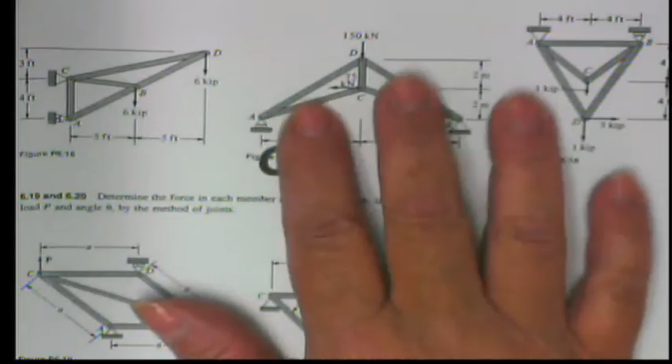All right, everybody. So right now we are starting to do a little bit of review on our homework, and we're talking about problem 617. We had a question about the angles. Now, first of all, if you started at point D, I would be concerned because you have 3 unknowns. Okay? So that would be a very difficult joint to start out.

I would probably do my statics first. Always do your statics first, no matter what. Find out the reactions at A and B. And then after that, I would work my way up. You know, but always look for a joint where there's only 2 reactions. But the specific question is, what does the geometry look like and what do my forces look like here at point D? And that's a very good question.

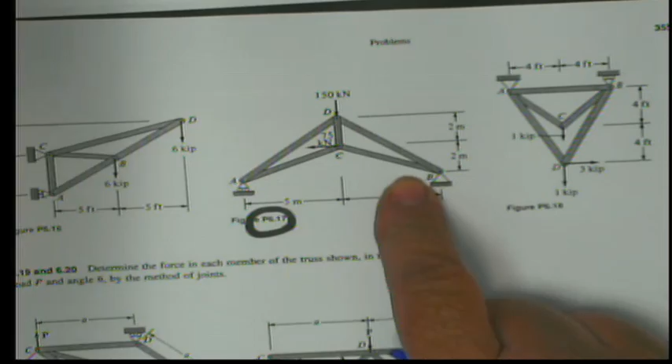All right. Well, if we draw this out, now I'm not sure you can see what I'm drawing. No, you cannot. Let me widen this out. Okay, there we go. So this is what D looks like. And what you really want is this angle, all right? Because we're still resolving everything back into x and y components. So that's kind of the big deal. So let's call this

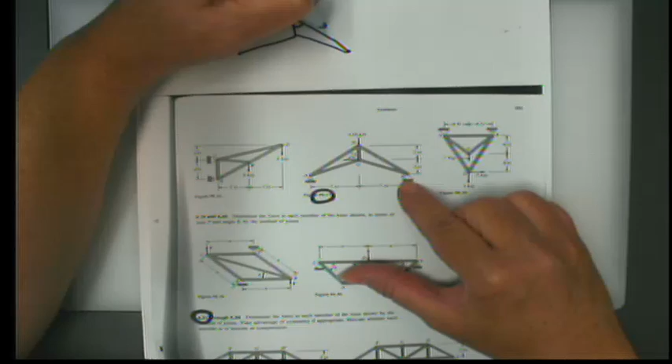dB and this dA. Now, one thing I want to show you is, because we have a force of 150 here, that is symmetrical, but this 75 kilonewton force kind of throws everything off. So we're not going to be able to really use symmetry in this, are we? Okay. In the second problem in 621, the forces are applied symmetrically and the distances are symmetrical, so we can use symmetry there. But here we're kind of out of luck. We're going to have to look at every single structural member. Okay. So what is that angle?

Well, what we are told is that this distance is 2 meters, and then the distance down to the bottom is also 2 meters, and this distance is 5 meters. Okay, so if we're looking at this angle, it's really based on this triangle where we have 4 and 5. So the vertical distance is 4 and 5, or if you knew this distance, this is 2. If you knew how far it was this way, you could use that angle. But here's where I have all of my data.

So if I call that angle, let's just say angle D, we have the opposite and the adjacent side, opposite, adjacent, and that is tangent. So the angle of D is the inverse tangent of 5/4.

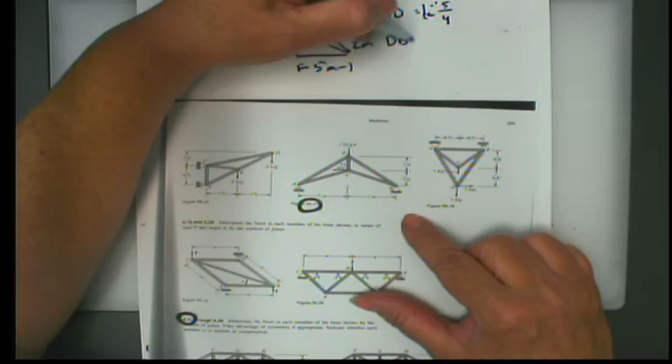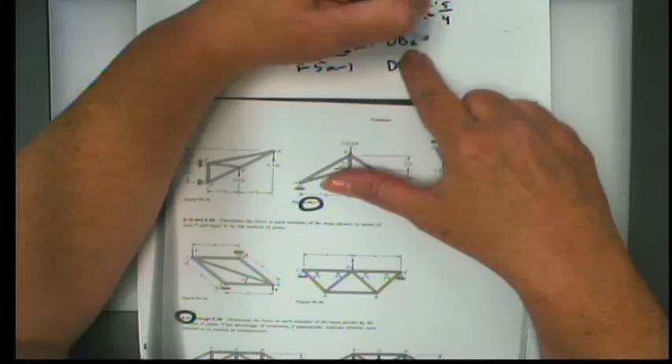Okay? Now, in order to use that, when we look at D sub B, for example, we're going to have D sub B in the x direction and D sub B in the y direction. In the x direction, since this angle is here, this is opposite, isn't it? So D sub B in the x direction is the entire force D sub B times the sine of angle D, since opposite over hypotenuse is the sine. And so this, because it's adjacent, would be dB cosine of the angle of D. Okay.

And this all harkens back to trig, which may have been a few years since you guys were doing the trig. But yeah, it can be confusing if you start looking at, well, what about this distance or that distance? But we're always taking everything back to x and y. You know, those are the coordinates that we'll use almost exclusively in this class, Cartesians.

Yeah? I don't know about the other guys in the class, but I think my biggest issue is I'll get to working and I just lose my train of thought. Like, is there some sort of way to keep your thoughts organized?

Well, just like maybe. I didn't mean that as a joke. I was serious. It's like a concern. You can meditate a little. No, I'm just kidding. So.

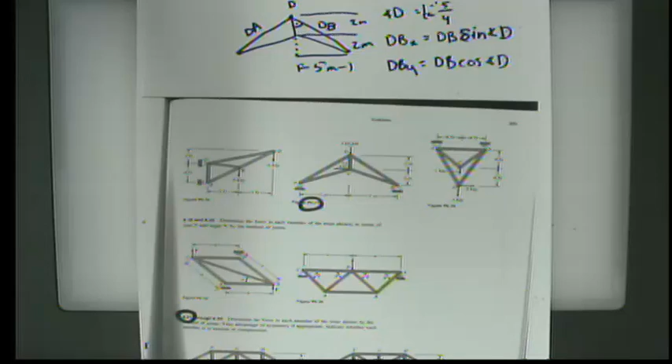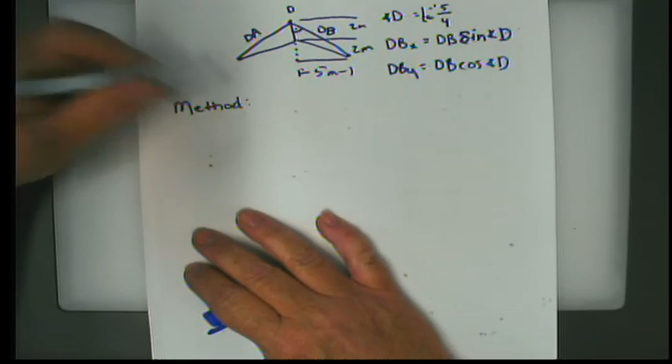No, is there something like just a list of procedural steps that we can follow? Yeah. Yes, this is what I would do, as sort of a method or a cookbook. The first thing that you should always do is your statics on the entire structure. So the external statics on the structure. Okay? So in other words, when I look at this, I'm going to bring this up, because they draw nicer than I do.

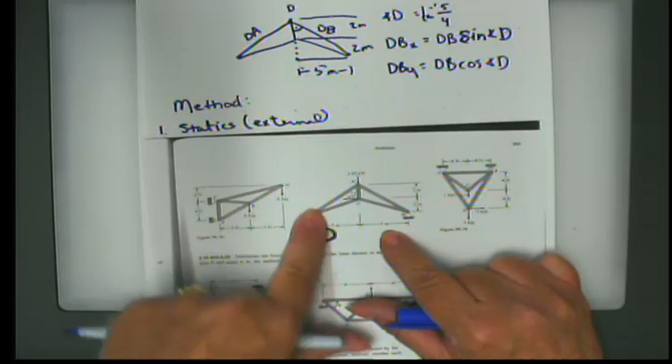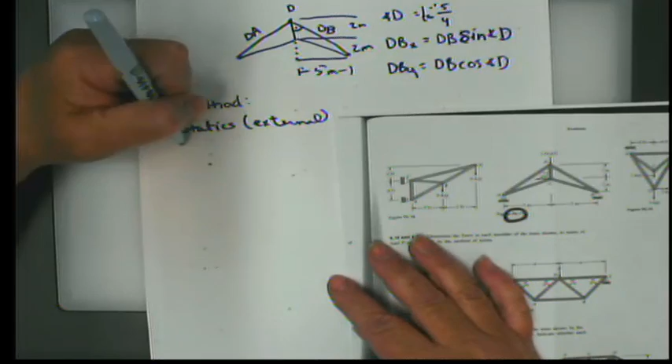I don't even know what I'm spelling today. I apologize.

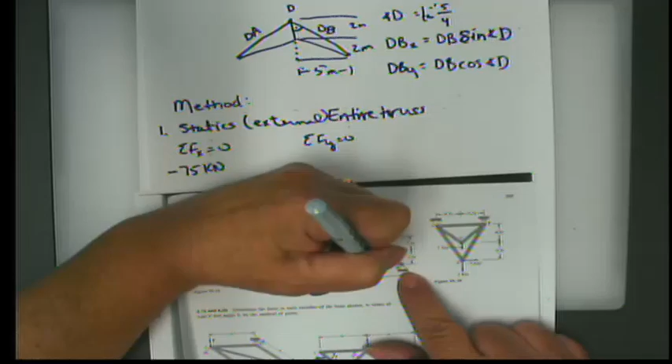Okay, so in the X direction, what do I have? Negative 75 kilonewtons. I don't have anything that's going to be borne here because this is a rolling support. So I'm going to have a reaction at B in the X direction, and I've drawn it as positive, equals 0. So what does that tell me? It tells me that the reaction at B in the X direction is 75 kilonewtons. Okay, so I'm just looking at the externals here.

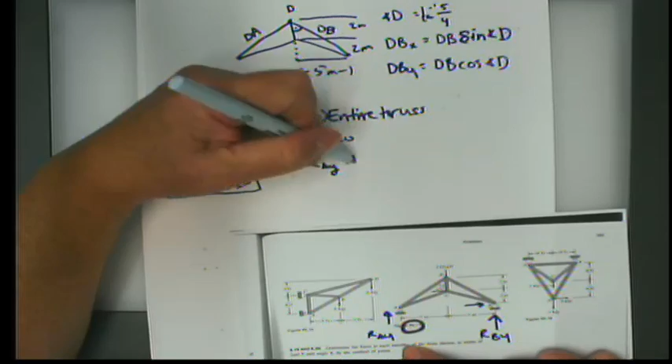Now, what about on A and B? I'm going to draw it positive. Doesn't mean it really is, but this would be the reaction at A in the Y direction, the reaction at B in the Y direction. So the way I have it drawn is the reaction at A in the Y direction plus the reaction at B in the Y direction minus 150 kilonewtons equals 0, and then I get equals 150 kilonewtons.

We don't know because of this force if symmetry is going to take hold and if 150 is going to be equally divided. So we need a third equation, and the third equation I would use is the summation of moments about some point on the entire truss has to equal 0. It doesn't really matter, but I would choose point B, just because there's two forces there. If I use B as my pivot point, then the reaction at B in the Y direction and the reaction at B in the X direction have no moment arm, so the moments from those forces about B would be 0. Okay?

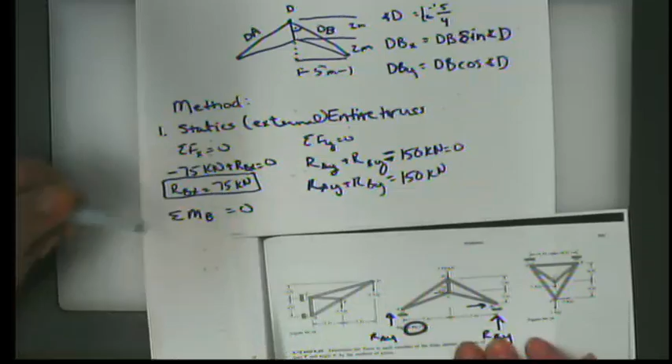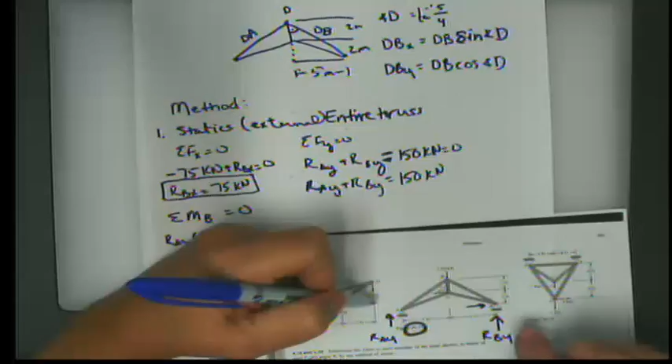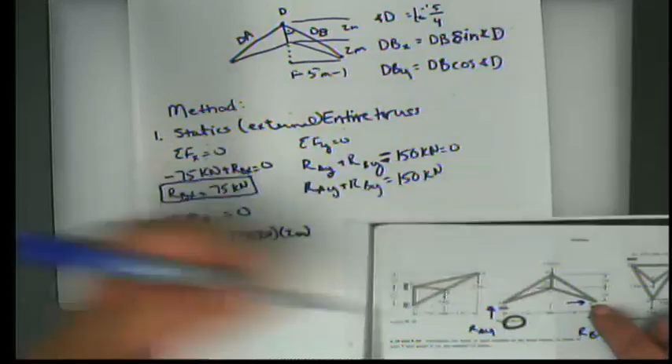So, having said that, let's take a look. I have a reaction at A in the Y direction, which is vertical. That means I use the horizontal moment arm of 10 meters. If I put a pin here and I pulled on A, that would be clockwise, which is negative. And then the 75 kilonewton about B, it's a horizontal force. So the distance is the vertical distance of 2 meters. If I only had that 75 kilonewton force, that would be counterclockwise, positive.

And then the last but not least, I have the 150 kilonewton force. I don't even know what you can see here. I need to pay attention.

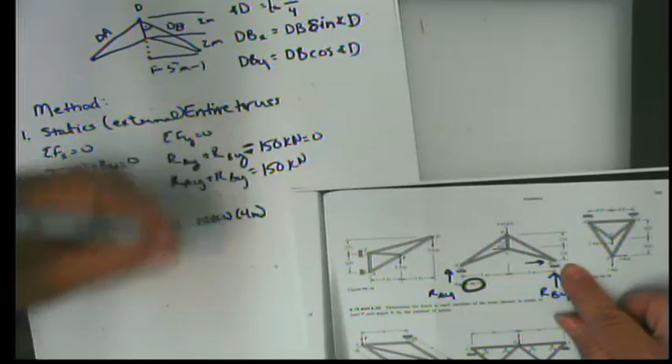Here we go. Since that's a vertical force, we have the horizontal distance of 4 meters. I'm not going to go through this laboriously. So then that would make a counterclockwise, so that's positive, equals 0. I can use this to solve for RAY, and plug that in here and solve for RBY. Okay? So this is the first thing I solve for, this is the second thing I solve for, this is the third thing I solve for.

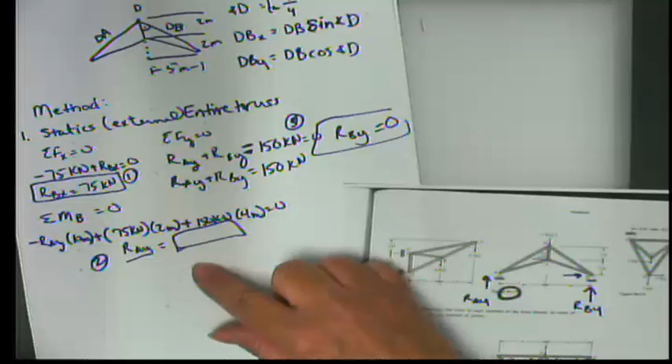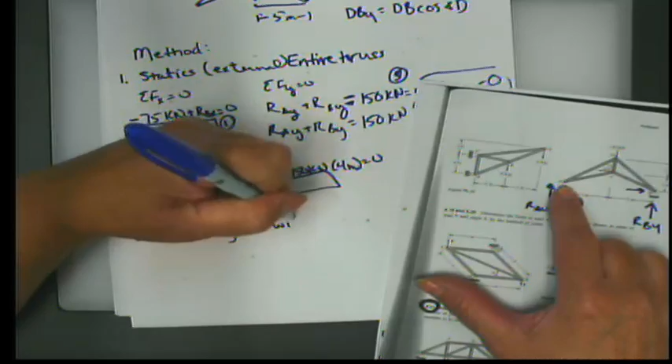The next step is, now we have those knowns. My reactions at A and B are known. So the next thing I need to do is to choose a joint with 2 or fewer unknowns. Because in the method of joints, we can't use the moment equation. All we have are summation forces X and summation forces Y. So if we have 2 equations, we just can't have more than 2 unknowns and solve for them explicitly.

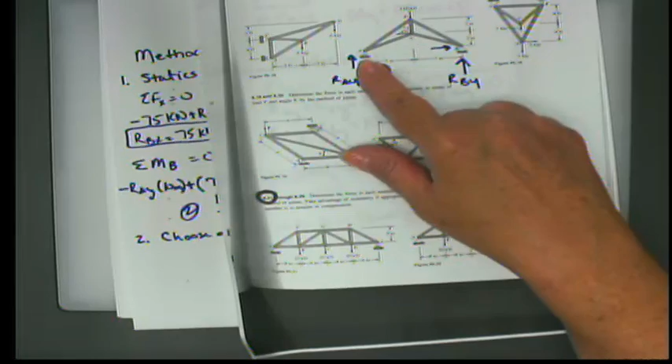Okay? So if we choose point D, we have 1, 2, 3 unknowns, and so that's why that one doesn't work as well. If we chose C, we also have 3 unknowns. But if we choose A or B, we only have 2 unknowns. So if, for example, we look at A, we have the reaction at A in the Y direction, which we just solved for here, and then we have some component of AD and some component of AC.

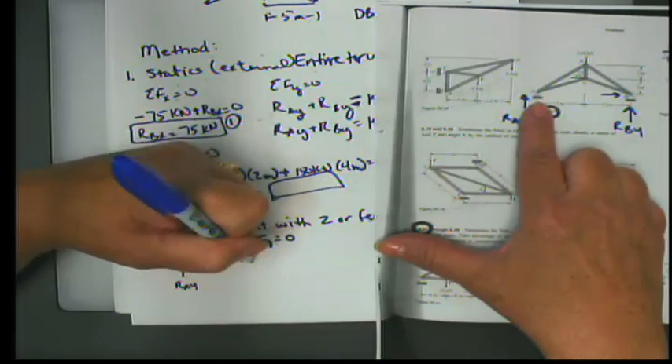Okay, this is purely y. Summation forces y equals 0. So we have RAY. We have to choose directions. At least one of these is going this way, and one of them has to go this way, because these are the only two with x's. So if one's pointing to the left, the other one has to point to the right. But since this one is pointing up, one of them has to be pointing down. So here I would have RAY minus AD in the y direction plus AC in the y direction equals 0.

And then summation forces x equals 0. There's nothing here, so we get AD, negative in the x direction, plus, sorry for being left-handed, AC in the x direction is equal to 0. And then you can do your trig, get your angles, and do cosines and sines. So the third thing is trig to finish. Okay.

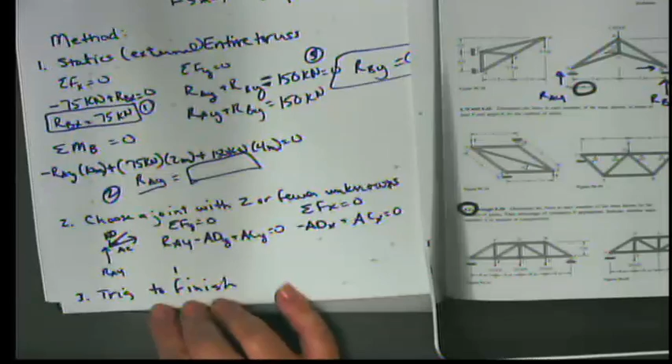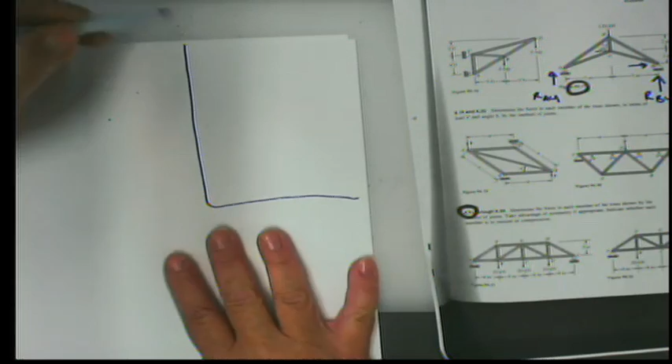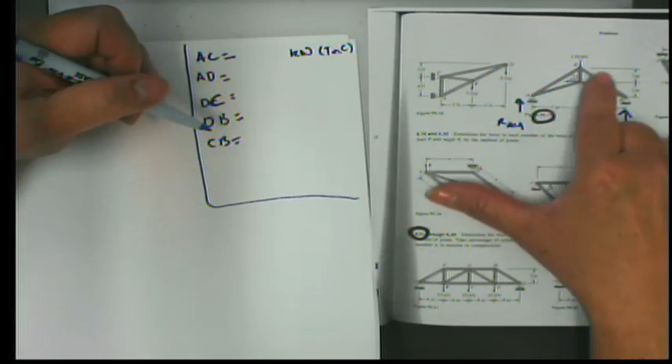Excuse me. All right. So then you start writing a table. Okay? Your answers are going to look like this: AC equals this many kilonewtons in either tension or compression. So we have AC, AD, DC, DB, and CB. 1, 2, 3, 4, 5. Okay, and that's what you want in each of them.

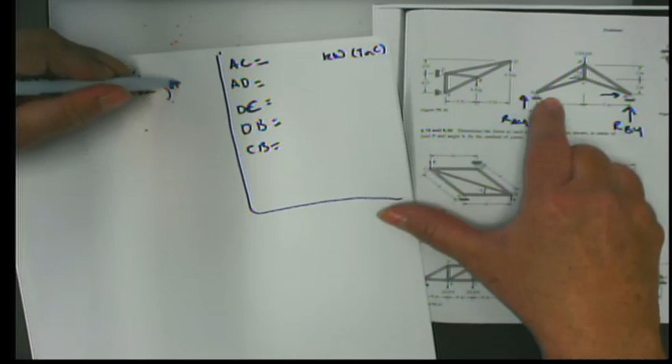So the next part is, after you choose joint A, so this would be step 4, since you know AD and AC, you can move to another joint. And because this time you have more knowns, D, for example, AD is known from here. So that means that here you would only have 2 unknowns. So you could move to joint D.

So you just remember that the force, the tension or compression in AD, is going to have the same magnitude at both joints, right? It's either going to be in tension or in compression, but the magnitude is going to be the same. If it weren't the same, that structural member would just fly out of the structure, because force equals mass times acceleration. So there's no way that that can have a net force other than 0 if it's standing still.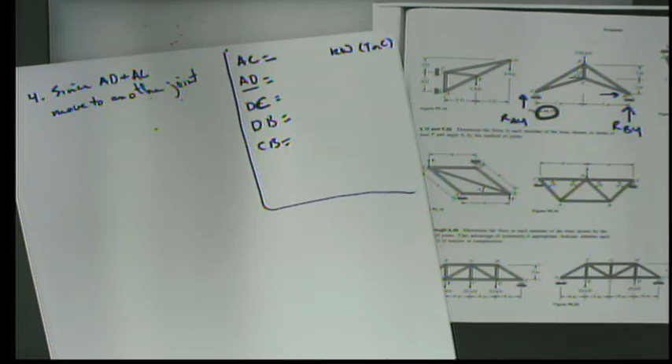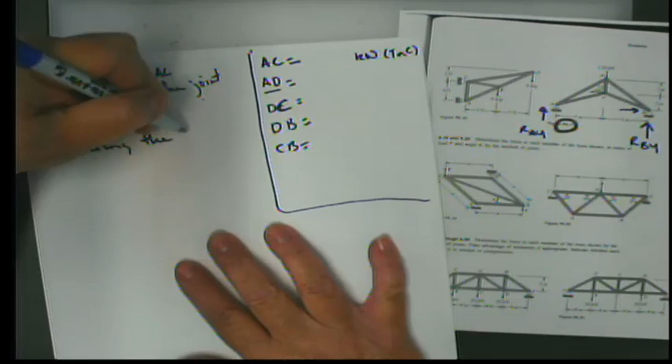Okay? So I guess this process would just be called maybe chasing the internal reactions. Okay? And so you find those and you just work your way down the list, and there you go. So the best way to stay organized with this, I think, is I always start with that table. It's like, these are the things I need. So when one of them pops out, you just sort of go, there it is.

And then the other way to stay organized is to just use an awful lot of paper. Because if you think about this, this is really like 5 little problems. You do the statics, but then you have to chase those reactions through the truss. It depends on how you do it, but you may do 3 or you may do 5 joints. But after you have your table filled in, then you're done.

So is that any help? Yeah. Okay. And it's a good question. Even though your classmates thought it was a funny question, I thought it was a good question. So. All right. What other questions do you have?

Okay. What I want to do today is a little bit different. I want to go into what we're going to do with these forces once we find them, which is find sigma. I've got the vodcast and the YouTube posted for you now. So you still need to finish this homework, but we're going to pretend like we did this already and move on to finding sigma, or normal stress, and see what that looks like. So we're going to go into our actual textbook.

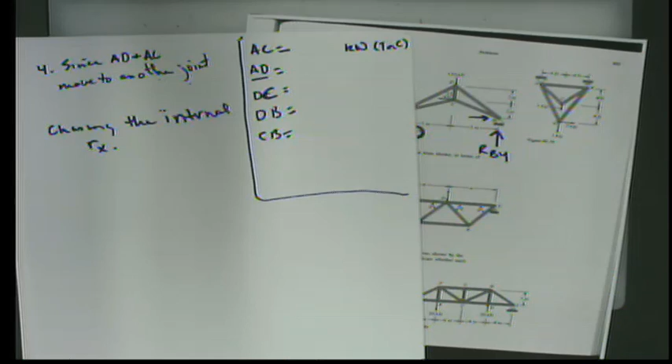In the new text, we're going to work 1.3 and 1.4. Okay? And if you're in the old text, the drawing is exactly the same, the process is the same, but the dimensions are a little bit different. So you'll have to kind of play along with that. All right? I'll try to be really explicit so that we can finish this up.

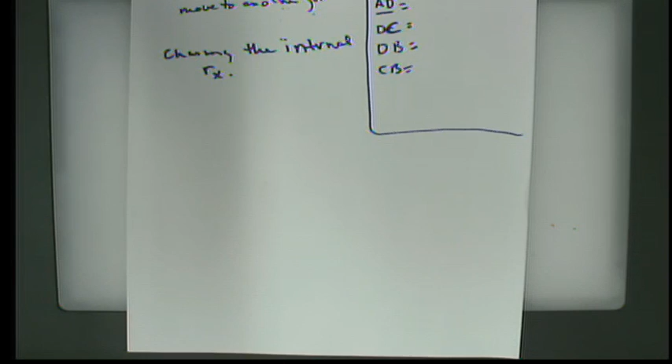All right, hearkening back to our first day of lecture, we learned that normal stress equals P over A, some load over some cross-sectional area, and that this load is an internal response. Now, we also designate normal stress with the Greek letter sigma.

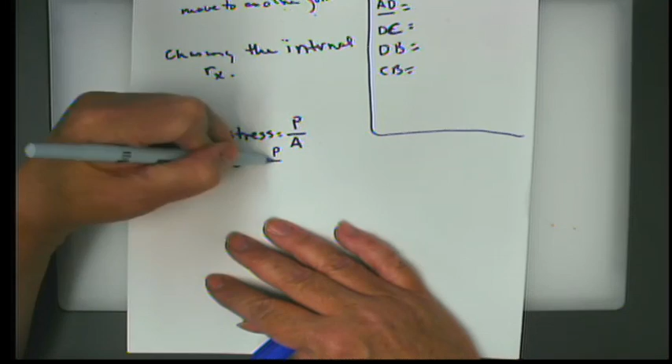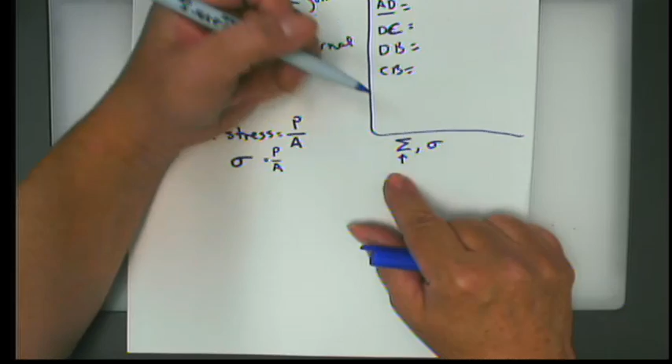And this, there are actually two versions of sigma. You may be familiar with this one, which is summation, and this one. This is capital sigma, and this is minuscule. This, they call it majuscule. It's not really capital, but it's majuscule and minuscule. But this is the form of sigma that we use to designate normal stress.

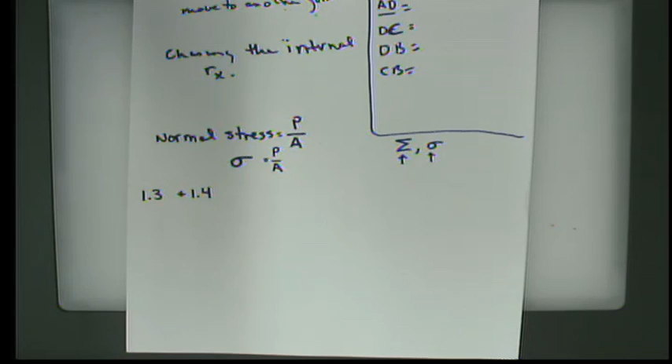Okay, so on problems 1.3 and 1.4 in the new text, and 1.1 and 1.2 in the old text, the problem reads, two solid cylindrical rods, AB and BC, are welded together at B and loaded as shown. Knowing that P is equal to 10 kilopounds, find the average normal stress at the midsection of rod AB and at the midsection of rod BC. All right, so as always, we start out by drawing.

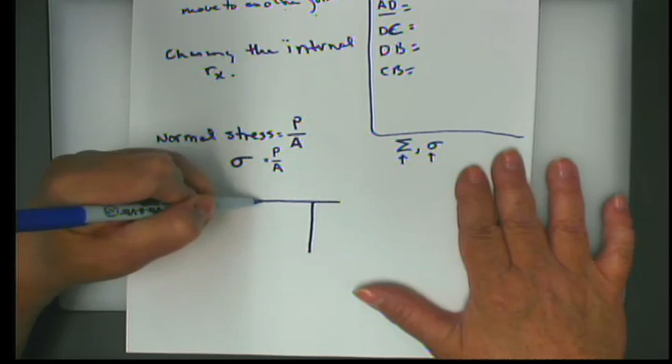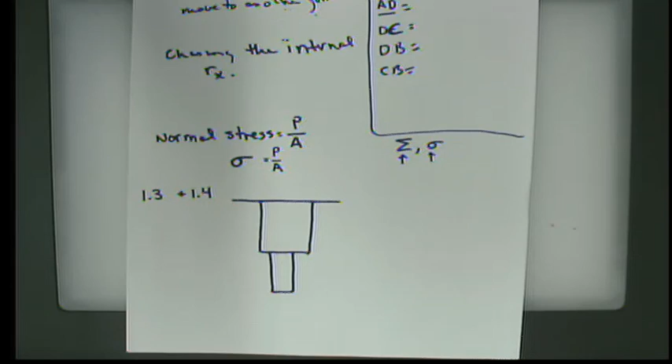All right. Now, the good news about engineering drawings is you really don't have to be a gifted artist. You just have to be able to simplify a problem to its minimum required components. Some of you may be very artistic, but for me, this is a good idea. So whenever I draw something like this, I always think of it as being like the engineering equivalent of a stick figure. So, you know, like you have a stick figure guy, and you just put on the most important things that indicate that this is a human being.

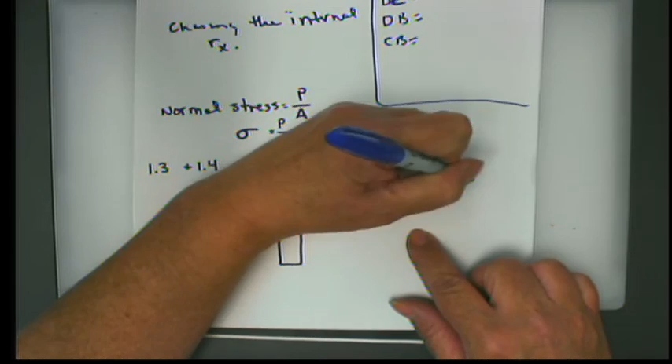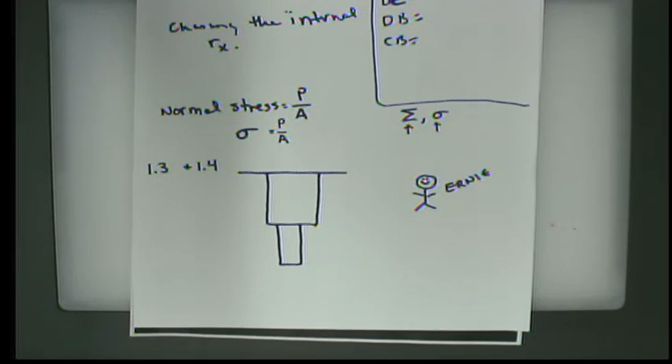So this is Ernie, our spokesmodel. So Ernie helps us sometimes draw things like that. So if you want to simplify things, just think like Ernie. You know, you don't want to have the beautiful stuff. You just want to have something very, very simple. All right, so Ernie will draw this picture.

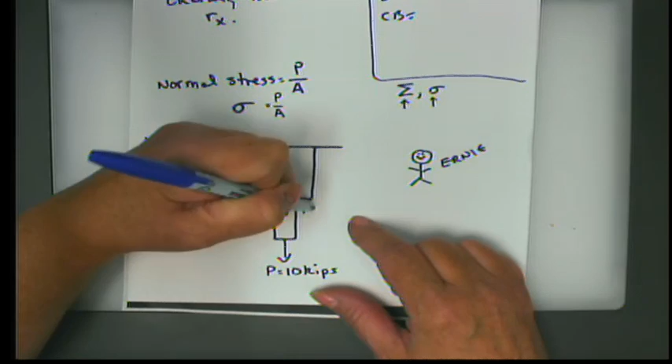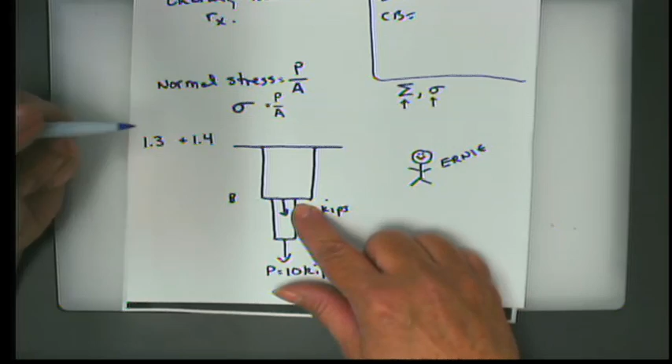We have a P down here, which I'm told is 10 kilopounds. And here at B, we have a different force, which is 12 kilopounds. Okay, we're attached to the wall, or to the ceiling rather, and here at B, we have a welded joint. What that tells us is this is not going to pull apart.

That the load P, the 12 kilopound load and the 10 kilopound load, are going to be distributed on this structural member in a way which we're going to determine in just a couple seconds. And it's not going to pull out of the ceiling, and the weld is not going to break. Okay, so we're kind of making that assumption, but it's a valid assumption at this particular point. All right, so let's find out what we know.

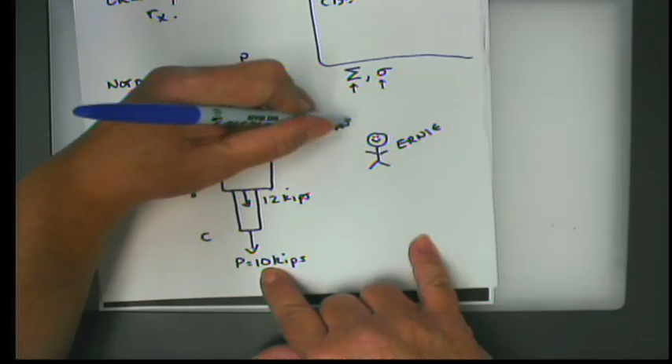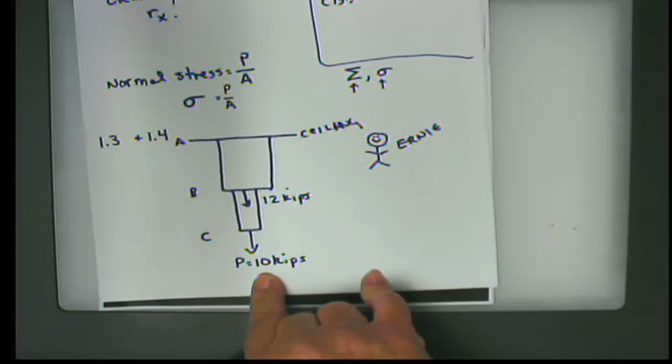Let's talk about the ceiling here. Where it is attached to the ceiling, if we're pulling down with 12 kilopounds and 10 kilopounds, how much is the reaction at the ceiling going to be, do you suppose? Assuming it's not going to pull out. Exactly. That is exactly correct. So once again, we start with the statics. And we have a reaction at the ceiling, which is point A, right?

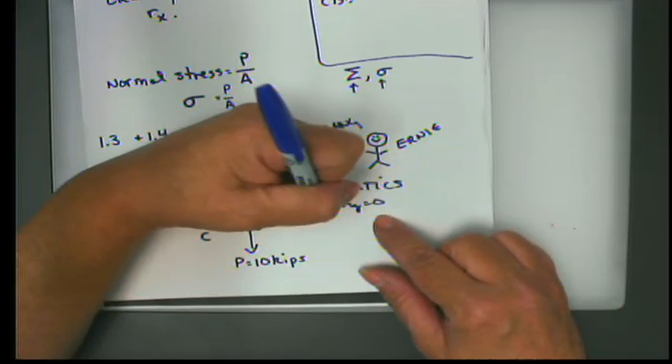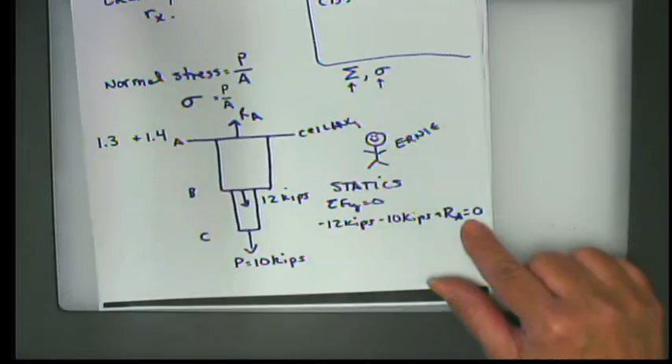So we say summation forces Y equals 0. I'm just doing what you already did in your head, so this is very good. So at B we have negative 12 kips, and down here at the bottom we have negative 10 kips, and then we have a positive reaction at A, and the three of those things have to sum to 0, otherwise it was going to pull out at the ceiling. So R sub A then is equal to 22 kips. That's the first important thing we need to find out.

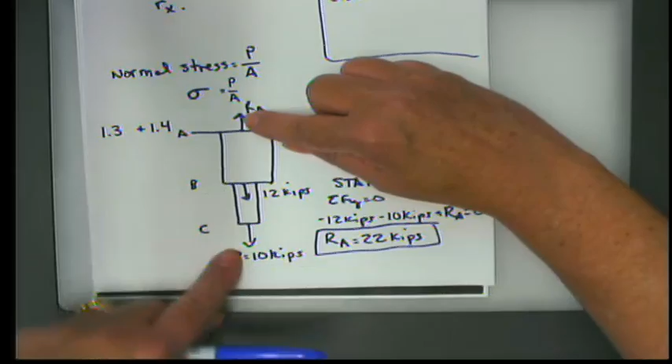Now here's another question for you. If you look at these two sections, do you think that the internal load in this section is the same as the internal load in this section? Because if you think about it, here in AB, we have 22 kips pulling up and 22 kips pulling down. But here in BC, if we were to cut away in the middle of this, we only have 10 kips pulling down, don't we? This 12 kips is just moving it, but it's not actually putting the lower part BC into stress, is it?

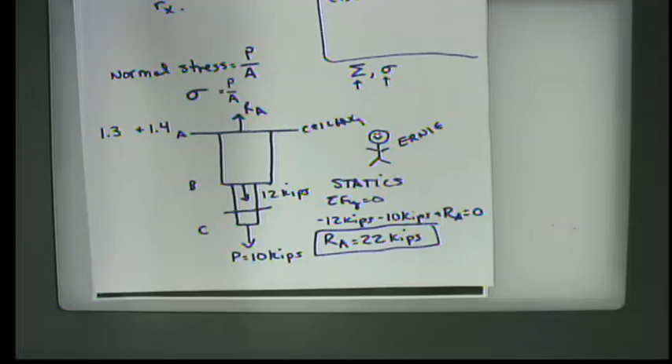Okay, so the first thing we need to realize is that the internal load in AB is, in this case, and often is, different than the internal load in BC. So we have to do statics on both parts after we just found our reaction at A. And the way we do this is called a cutaway. I don't know if it's officially called a cutaway, that's what I always call it. In mechanics of materials, we're always looking at the internal response, okay?

So let's look at part AB of that rod. If we just draw part AB from the ceiling to the midpoint, which does not mean exactly in the middle, it just means not at the edge, okay? We recognize that R sub A is pulling up with a force of 22 kips. And so we're going to have some reaction here in AB that's pulling down.

So the summation of forces in the Y is equal to 22 minus the reaction in AB, which is equal to 0, or 22 kips is equal to the reaction in AB. Now, tell me something else. Is AB in tension or in compression?

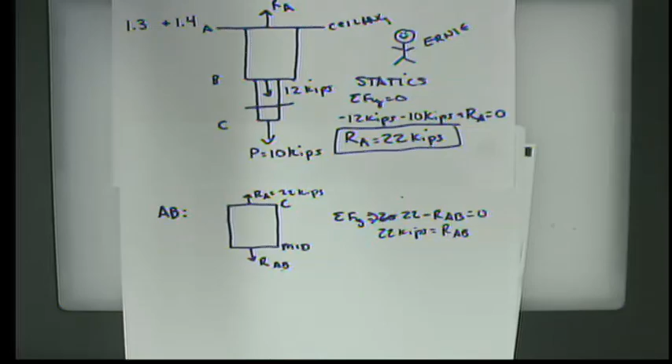It is. It is absolutely in tension because it's being pulled away from the ceiling. All right, let's do the same thing for BC. In BC, let's cut away again. And this is the midpoint of BC. Once again, not exactly in the middle. It doesn't have to be, but just sort of in the middle.

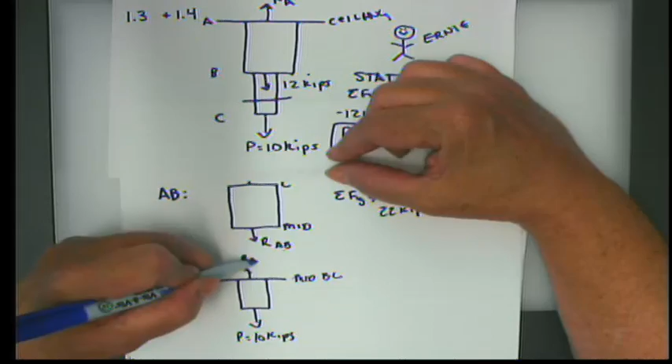Here, all we have against it is 10 kilopounds pulling down. And here we'd have the reaction in BC. So when we do the summation of forces in the Y direction equals 0, we get the reaction in BC, which is positive, minus 10 kips equals 0, or the reaction at BC is 10 kips. And once again, it's in tension. Now, when you cut away, everything above just becomes a reaction. So you're only concerned with the external loads on one side of the reaction.

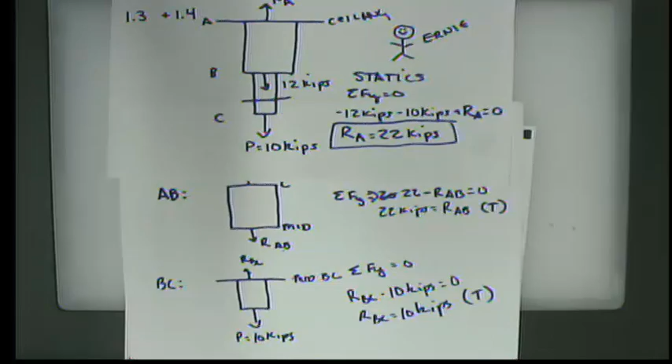What would have happened if we would have cut it the other way? Well, it would have come out to be exactly the same, which is the good thing about math and engineering. If you do it right, it comes out to be the same. If we had instead cut it this way, so that we had our reaction down here, we would have a 12 kilopound load pushing it down and a 22 kilopound load pulling it up.

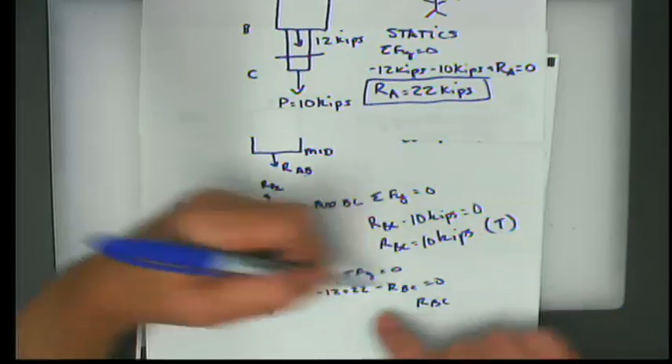So when we did the summation of forces Y equals 0, we would get minus 12 plus 22 minus the reaction at BC is equal to 0. So we would get the reaction at BC is equal to 10 kilopounds. So it's exactly the same. So I wanted to show you that because it's more complicated to do it that way, but it does not matter which way you cut away.

The only thing that you need to know is that after you make that mental slice, you only look at one side, and everything else becomes the reaction. And it always adds to 0, or else it's going to start to move. So that's sort of the analysis process.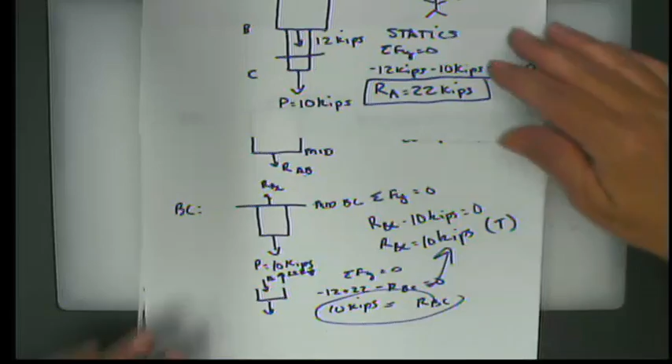Okie dokie. Continuing then. So we know, let me get this down, that the reaction at A is equal to 22 kips. And no, I don't want to put that. I want to use this kind of labeling. The reaction in AB is equal to 22 kips, and it's tension. And the reaction in BC is equal to 10 kips, also in tension.

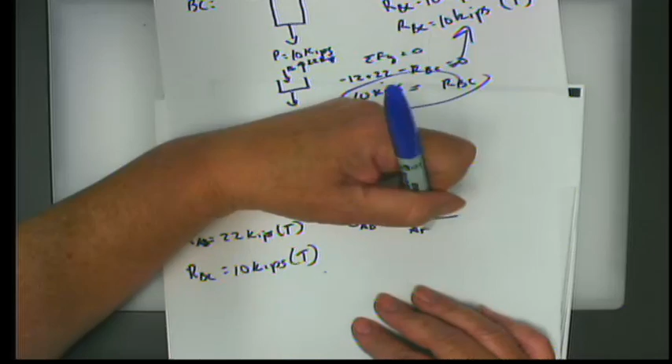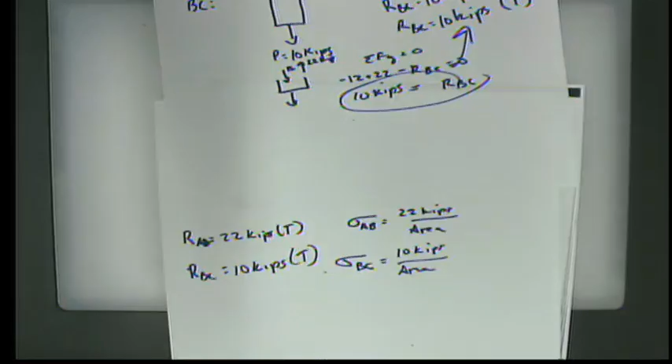Okay, so what are my sigmas? Sigma in AB equals 22 kips over the area. Sigma in BC equals 10 kips over the area. So now we need to go back to our picture. What is the area? Oh, I never did this. I always did this. What is it?

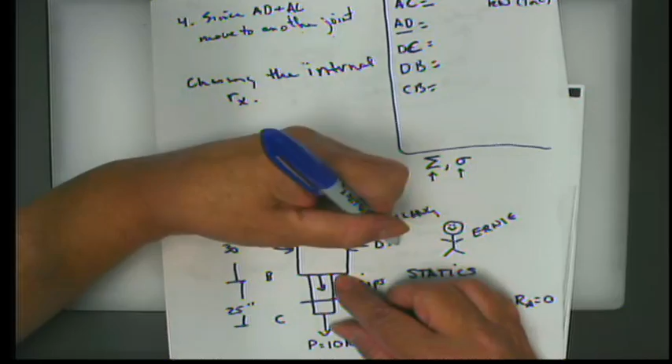Well, let me get some dimensions here because I didn't really put out all of the dimensions on this since we have different books. Okay, we're told that this length is 30 inches. We're told that this length is 25 inches. We are told that this diameter is 1.25 inches. And we're told that this diameter is 0.75 inches. Okay? So these are cylindrical rods.

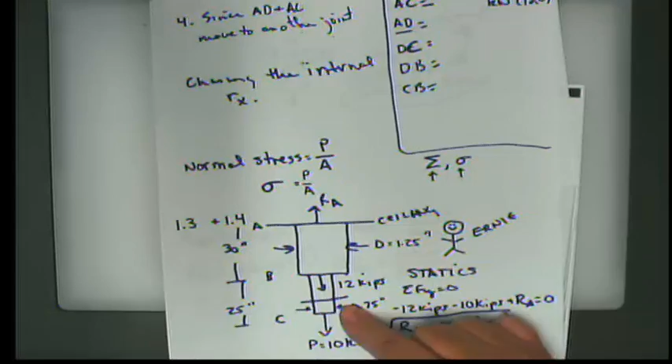What is the cross-sectional area of a cylinder? What shape is it? Cylinder? Yes, circle. Very, very good. I knew you knew. Okay, so the area of a circle is either pi r squared or pi d squared over 4. And we'll just use pi r squared because it's easy enough. So here we have 22 kips over pi r of AB squared. And here we have 10 kips over pi r squared of BC.

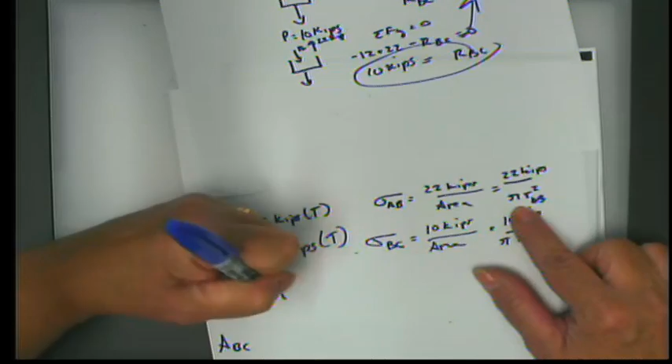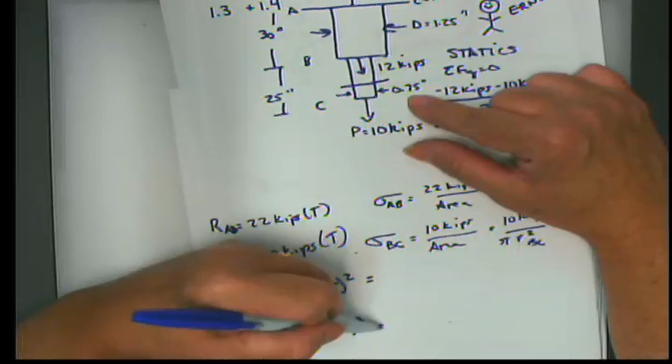So let's find out the area of AB and the area of BC. The area of AB then is pi times, if AB has a diameter of 1.25 inches, it has a radius of half of that, or 0.625 inches. We square that. And BC, pi times half of 0.75, which is 0.375 inches squared. Anyone have their calculator at the ready to tell me what those areas are?

0.625. Okay, when I do this one, I get 1.227 square inches. And if you guys get a different number, please tell me, because I'm doing it with this little fake calculator on the computer, so it's not very advanced. And for the other one, I get 0.4418.

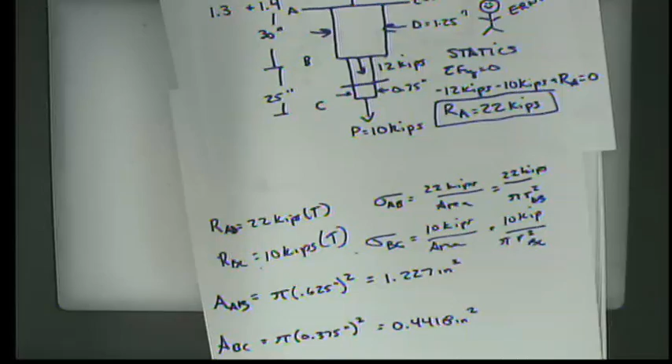Does that look correct to you? Mm-hmm. Excellent. Thank you, Jacques. All right. So now let's finish off the job.

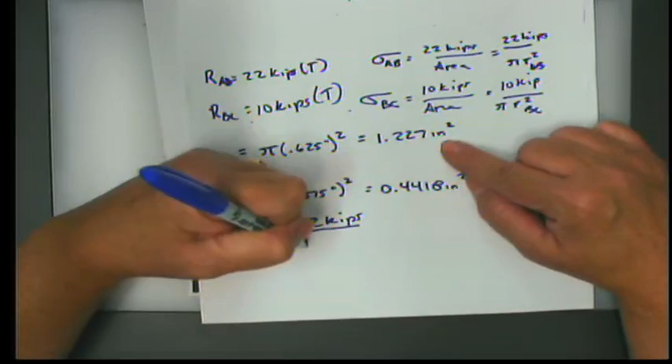That means that sigma in AB is going to equal 22 kips divided by that cross-sectional area of 1.227 inches squared. Now we'll do the math, we'll do the numbers, and then we'll decide what the units are going to be. 22 divided by 1.227 is 17.93.

And let's just do this since we're kind of on a roll. That will be 10 divided by that cross-sectional area of 0.4418, which is 22.63. We'll talk about what those mean in just a minute.

And what are my units? Well, a kip is 1,000 pounds per inch squared. A pound per inch squared, a pound of force per inch squared, is a unit called a pound per square inch, which is abbreviated PSI. Or a kip, which is 1,000 pound per inch squared, is a unit called a KSI, kilopound per square inch. So this number is in KSI, and this number is also in KSI.

Or you could write this equally correctly as 17,930 psi. Or you could write it as 17.9 times 10 to the third psi. Any of those things are fine. But this gets into sort of our strange U.S. customary system of units. It's not really even a system. It's just a whole bunch of stuff that's thrown in together.

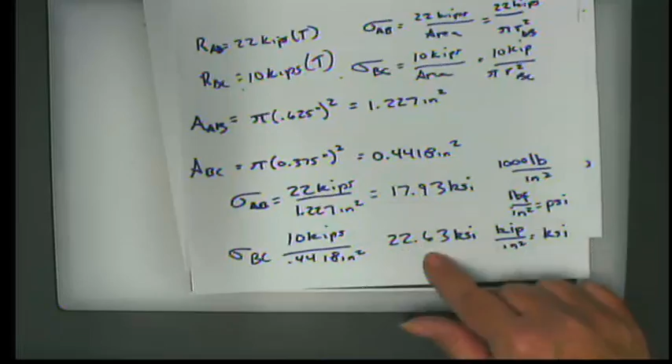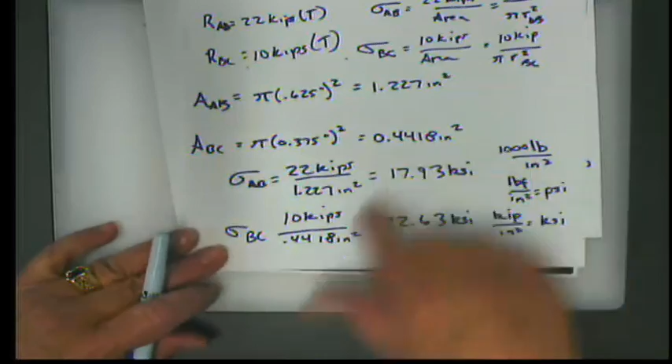All right. So that's the material that we covered today. That's going to go along with the stuff that you did last time to sort of get us to where we need to be. At this point, you guys have any questions?

Okay, so the homework for tonight, in addition to the material that we just covered and that I put up on YouTube for you, we need to do 2 more problems. One of them is going to be very similar to the one we just did. And these are both in the new textbook. So if you have the old textbook, you need to get a copy of the homework problems from the new textbook. So the 7th edition of the textbook.

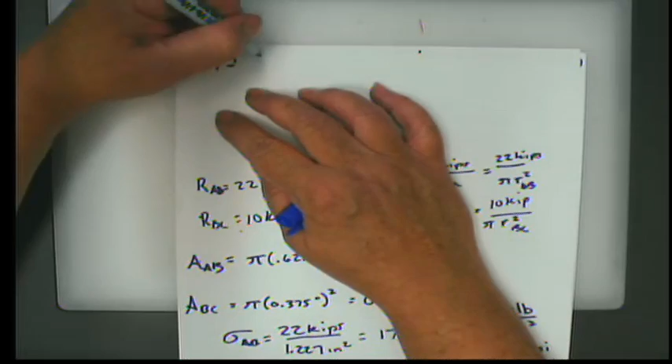The problems that I would like you to do are 1.1, which is similar to what we just did. And then there is a frame. I wonder if I want to do that one or if I want to do a different one. Let's do problem 1.11, which is a Pratt truss. Okay, it's a type of a bridge truss.

So they're asking you for the average normal stress in member BE, which means you're going to have to use the method of joints to find the tension or compression in BE, and then divide it by the cross-sectional area. So the easy part is once you find the load, dividing by the cross-sectional area really doesn't freak people out, except for the unit part, but getting to that point is the more difficult thing, okay? So those are the 2 problems.